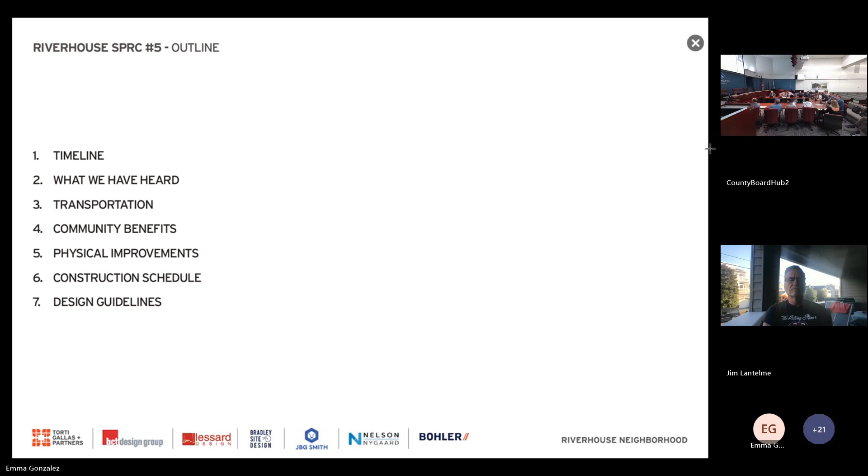Terrific. Thanks, Mr. Chair, members of the commission. We're excited to bring you a presentation for SPRC number 5 for RiverHouse. On the next slide, a quick look at our agenda. I won't walk through each item specifically, but it'll give you a sense of what we're going to talk about here tonight.

On the next slide is just our timeline and where we've been. As we've talked about, we've been at this for some time, since the sector plan was adopted more than 3 years ago. In that time, we visited the LRPC 3 times, and this will be the 5th of the SPRC, along with a public space master planning process as well.

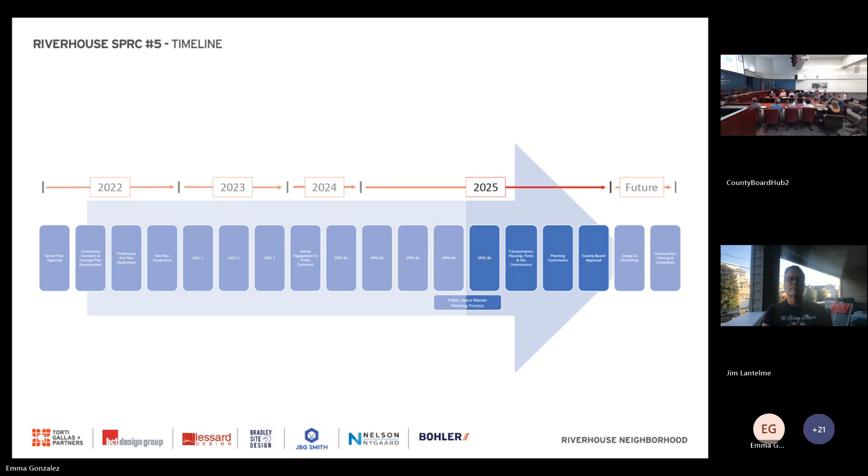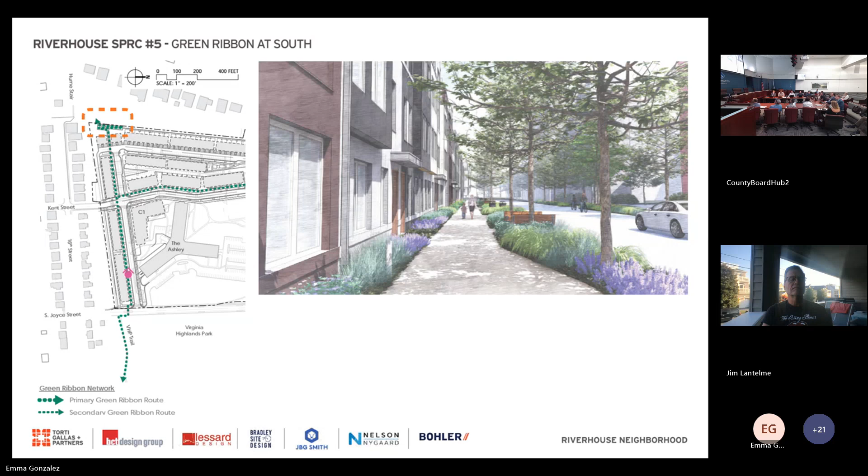On the next slide, a few changes based upon what we heard at prior meetings. First, we heard a desire to straighten the green ribbon at the southwest corner of the site where the townhomes are. Previously, this path had a dog leg in it as you hit that southwest corner of the site that folks thought was a bit confusing and circuitous. That has now been straightened out to allow the green ribbon to go on a direct path through the entirety of the property, running north-south, as you see there on the screen.

On the next slide, there's been some discussion of the connection up to Lynn Street at the western edge of the site and a request for more information about studying an alternative, as well as some views. Here you can see what our proposal looks like. We've worked with staff and the community to come up with this proposal, and we think it's the best possible solution for a number of reasons, principally addressing the difficult topography in the area, providing accessibility, and preserving both existing vegetation and a view corridor.

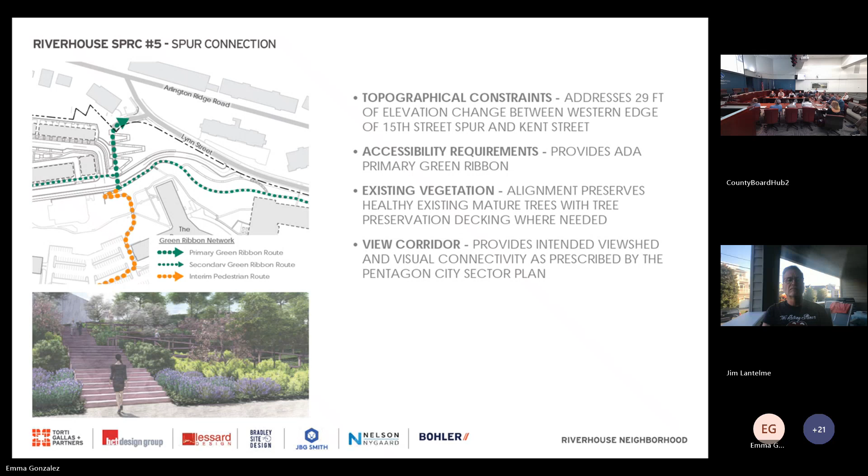On the next slide, you'll see we've added a little depth and more detail as to what this area may look and feel like, showing lighting treatments, seating interventions, as well as wayfinding opportunities. This gives a better sense of what the area is going to look and feel like when it's complete.

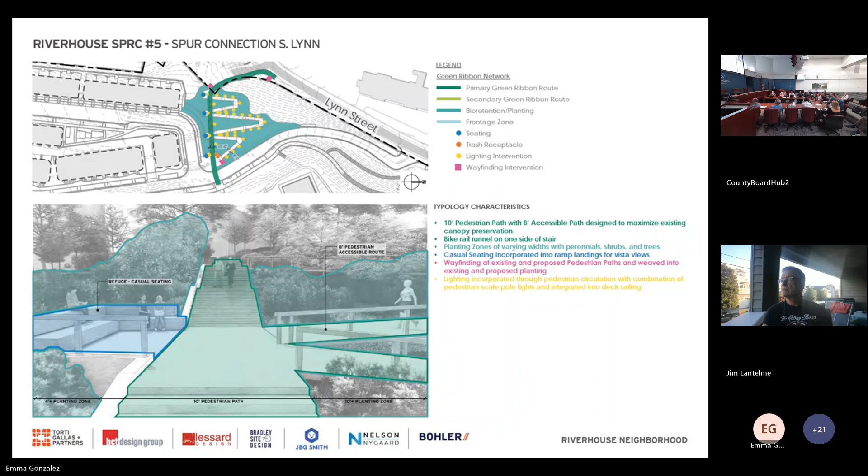I want to reiterate that C2 and C3, while part of the overall PDSP, are not being approved as part of the final site plans before you this evening. They would only go forward in the event of future final site plans. On the next slide, you will see the view without C2 and C3.

This is the condition that will be, if this project goes forward in what you're considering this evening, this is what would be approved. This would be the view from the top of that spur.

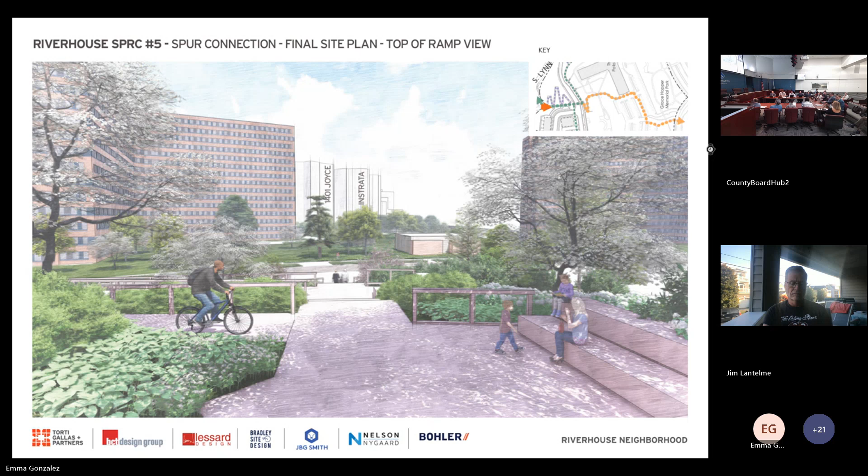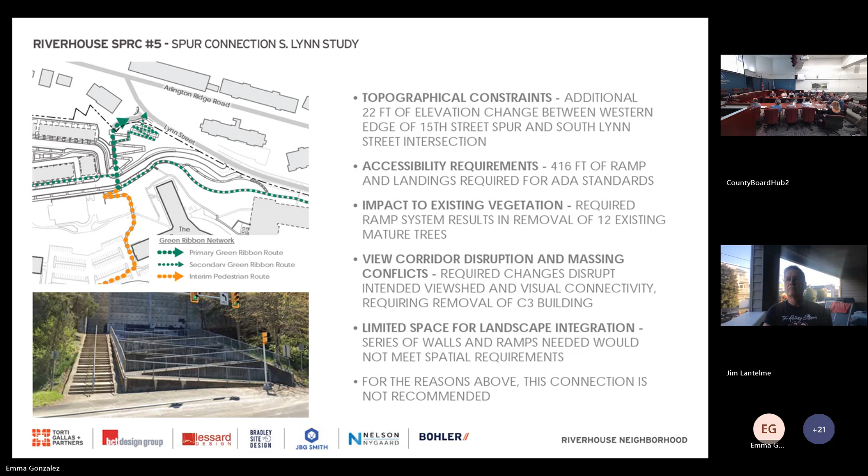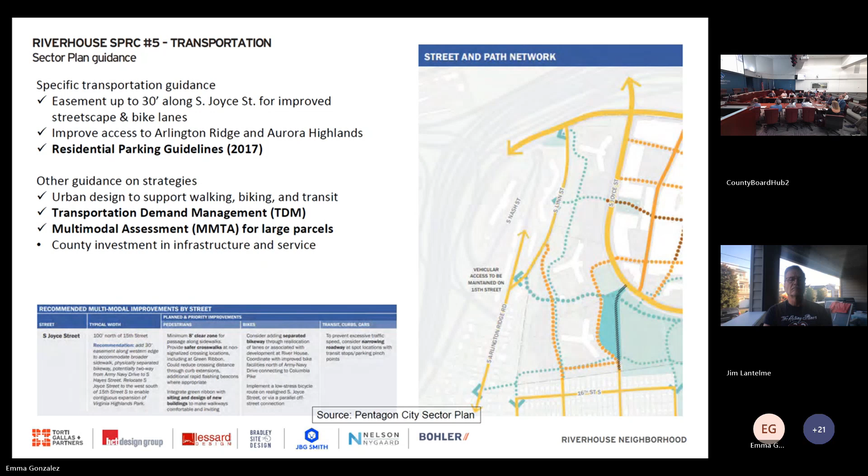With that, I'm going to turn it over to Chris Fornash to discuss transportation. Thank you, Ked. On the next slide, we highlight the requirements of the sector plan with respect to transportation. The unbolded items are things we discussed last time, specific street reconfigurations and other multimodal elements. Today we'll speak briefly about the bolded items: parking, TDM, transportation management plans, and the results of the multimodal transportation assessment.

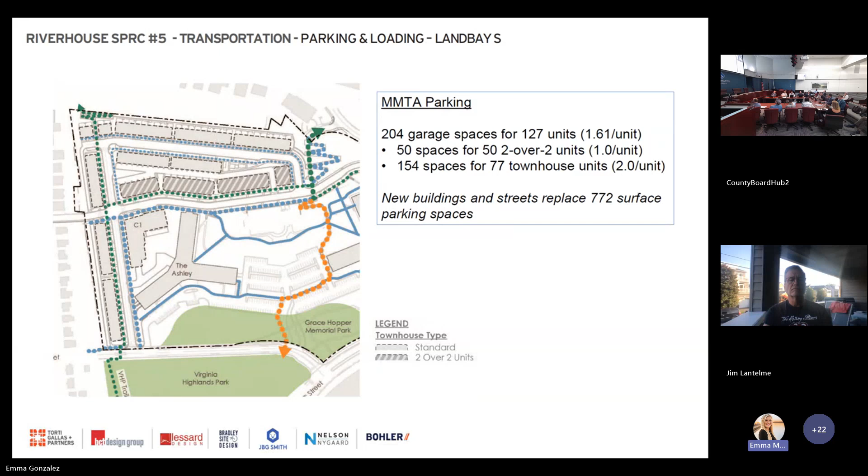Next slide. Starting with parking and loading, here you see Land Bay S highlighting two different types of units: standard townhouses and 2/2 stacked flats. The stacked flats have a parking ratio of 1 space per unit, and the townhouses have a ratio of 2 spaces per unit, for a total of 204 spaces for 127 units. Also notable, this Land Bay S development is replacing currently 772 surface parking spaces.

The next slide, building C1, has more information. I'll start with the locations of loading and parking garage access, that's the blue and yellow arrows. You'll see they come off the extended 15th Road. The red arrow indicates where the roll-in entrance is for the bike parking indoor in the garage at grade. In total, there are 42 vehicle parking spaces for 102 units in this building, a ratio of 0.41 per unit.

And 6 additional spaces for visitors, plus 48 indoor at-grade bike parking spaces, so 0.44 per unit plus visitor space inside. This building replaces 44 surface parking spaces currently. Last time we heard some concern about where pickup drop-off would occur here, so highlighting next to the red arrow the space on the curb, that's 2 spaces reserved for pickup and drop-off in front of the main entrance of the building on extended Kent Street.

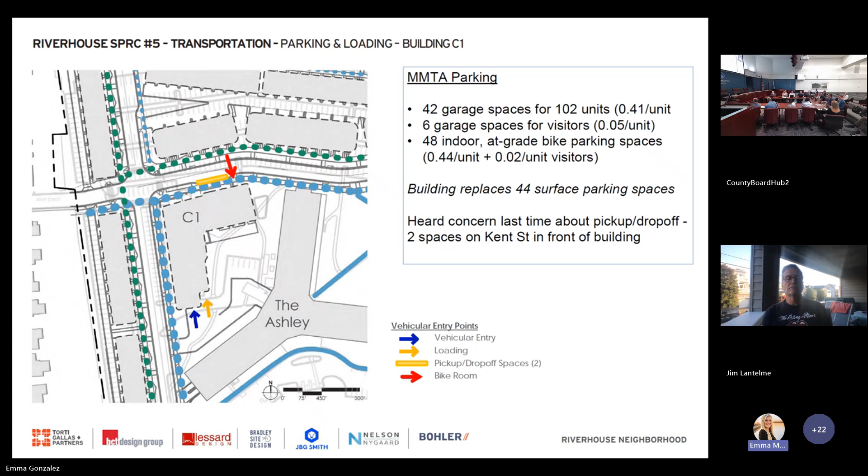Next slide, building N1. This is a larger building of 509 units. There are 512 proposed garage parking spaces on two stories, two levels. 265 of those are for units in the building, that's 0.5 per unit plus required visitor spaces. There are also 32 spaces for the 15,000 square feet of retail in this building, proposed to be a health clinic use, utilizing requirements related to that use. And then an additional 215 spaces to replace existing parking, made available to existing RiverHouse buildings and tenants.

I realize I skipped over pointing out where both the vehicle and loading dock entrances are to this building. They're on the left, the blue and yellow arrows, and those entrances are off a driveway that connects to big Joyce Street at the bottom of the page. The entrance to the bike room is the red arrow adjacent to the mews. Although it's next to ramps and other grade changes, it's an at-grade roll-in entrance to the bike parking facility, where 204 indoor at-grade bike parking spaces are provided, that's 0.4 per unit, plus additional outdoor spaces for visitors. There's also one space in the indoor facility for a retail employee, plus additional visitor spaces outdoors. And again, this building is replacing 254 current surface parking spaces.

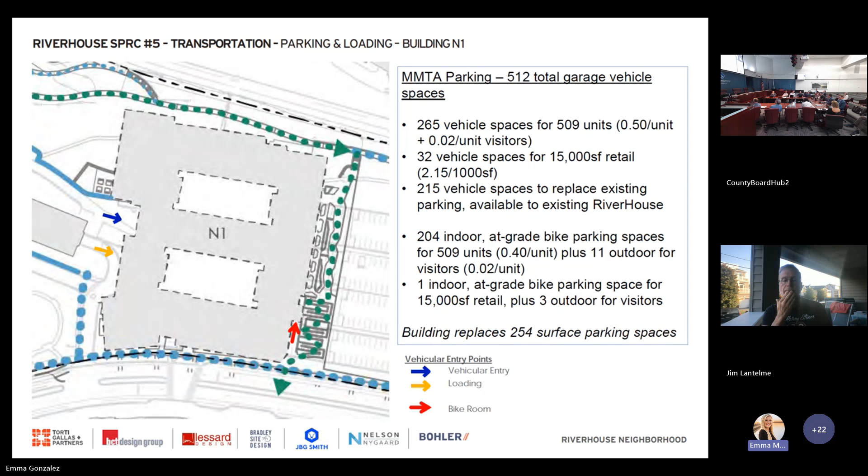The next slide goes into some detail about the multimodal transportation assessment. Many of you on this committee are familiar with what an MMTA requires. While we're talking primarily about the full site plan buildings that are the subject of SPRC, the MMTA considers the full PDSP. It's important to look at the potential traffic and other transportation implications of the full development at this point. So the MMTA looks at access by all modes to and around the site.

In the middle here, I want to go into a little detail on what the MMTA considers in terms of development. For the full PDSP in this case, you start with the base year traffic.

That includes traffic generated by the 1,676 existing residential units, or more appropriately, the people in those units. We then add in potential traffic from newly approved or built projects, as well as other redevelopment included in the sector plan, and general background growth. And then to represent the project itself, all of Land Bay S, all of building C1, as well as potential future buildings C2 and C3, building N1, and potential future buildings N2 and N3.

So that's 2,785 new residential units that generate on average about 7.5 person trips per unit. We can go into more detail about that if you'd like. And 570 daily person trips to and from the 19,000 square feet of retail space in the full PDSP.

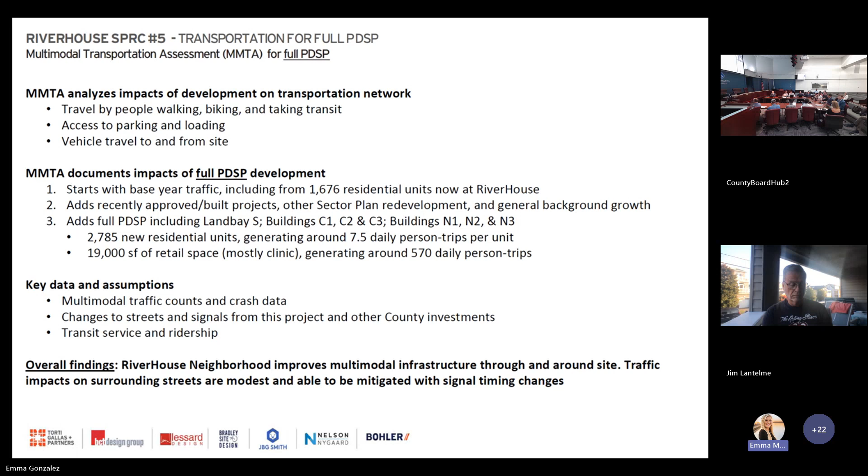Next slide, to add a little more detail - the graphic on the right shows, in black arrows, the forecast estimated number of vehicle trips in the morning peak hour coming to or from RiverHouse. Looking at the top right, consolidating all the RiverHouse driveways onto Joyce Street, in the section that will be road dieted, it's essentially just under 3 additional vehicles per minute accessing RiverHouse to and from big Joyce Street.

Again, reminder, this is for the full PDSP - that's the buildings being proposed today and final site plan, plus all potential future buildings. Moving to the lower right, to the southeast corner along relocated little Joyce Street, an additional just over 3 vehicles per minute. And then, smaller impacts at the 16th Street and Lynn Street access points to the site.

A little more detail about the street improvements included here, for the full PDSP: the road diet on big Joyce Street we described last time, the extension of South Kent Street through the site plus other on-site streets, the relocation of little Joyce Street to increase the size of Virginia Highlands Park, the final green ribbon and other walking and rolling paths discussed in previous SPRCs and today, and the Army-Navy Drive Complete Streets project currently being built by the county.

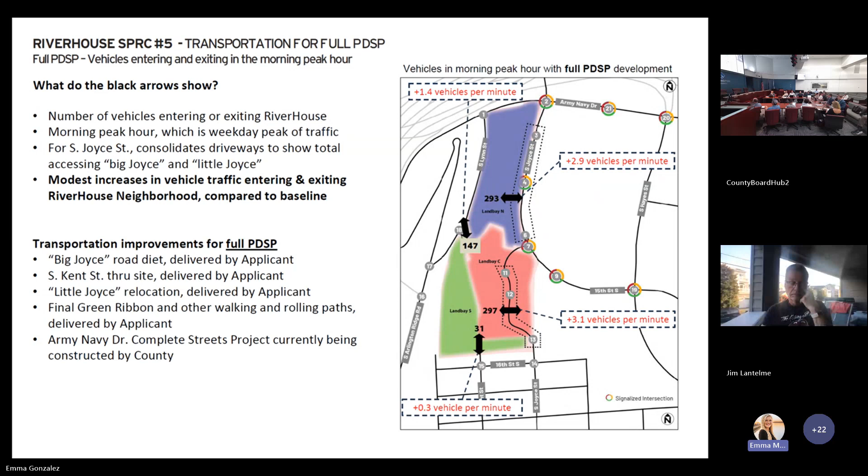Now, focusing on the transportation impacts of the final site plans - just Land Bay S, building C1, N1 - the analysis is largely the same, except we're including fewer new future units, 783 to be specific, still generating around the same average per-unit trip number, and somewhat less trip making related to retail space since it's only 15,000 square feet. And as this won't surprise you, the traffic impacts of this lower amount of development are anticipated to be even more modest than those from the full PDSP.

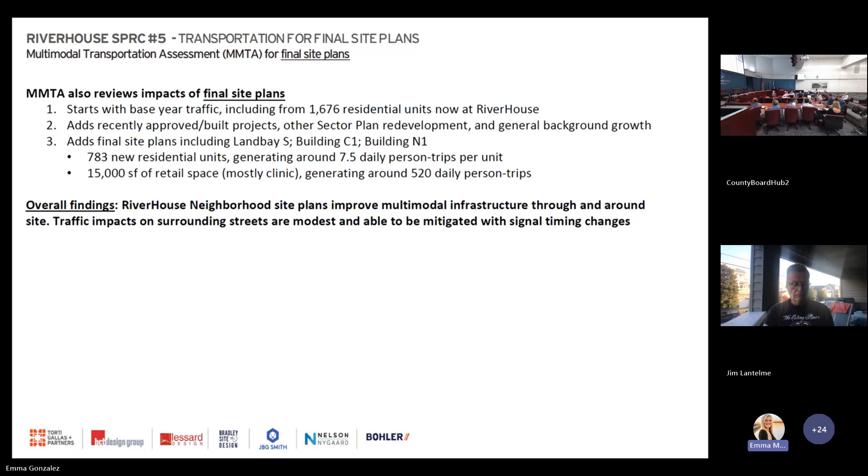The next graphic bears that out. It's the same type of information as the previous slide, but accounting just for the final site plans: Land Bay S, building C1, building N1. You see impacts ranging from 0.1 additional vehicles per minute entering or exiting by 16th Street, up to 1.1 vehicles per minute entering or exiting at Lynn Street. This includes all the transportation improvements discussed, except for the relocation of little Joyce Street.

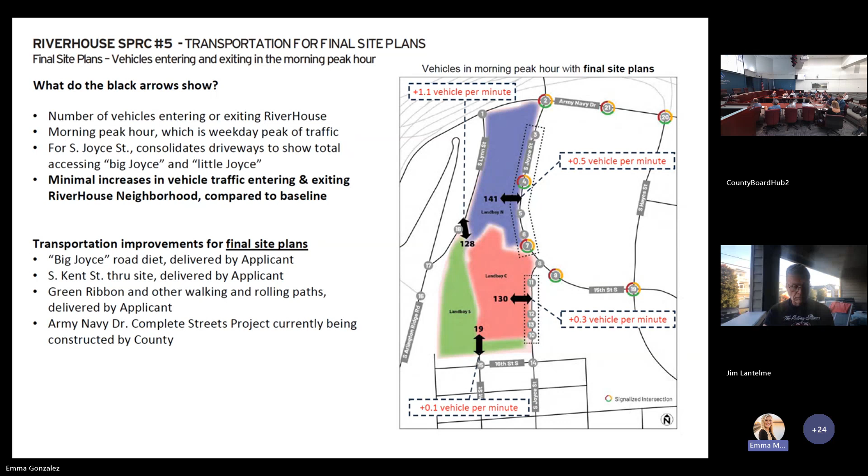The final transportation slide goes into a little detail on the transportation management plans, which incorporate the transportation demand management commitments of the development. You see a fairly standard set of participation, funding, and information provision components that will be part of the transportation management plans finalized as part of site plan conditions.

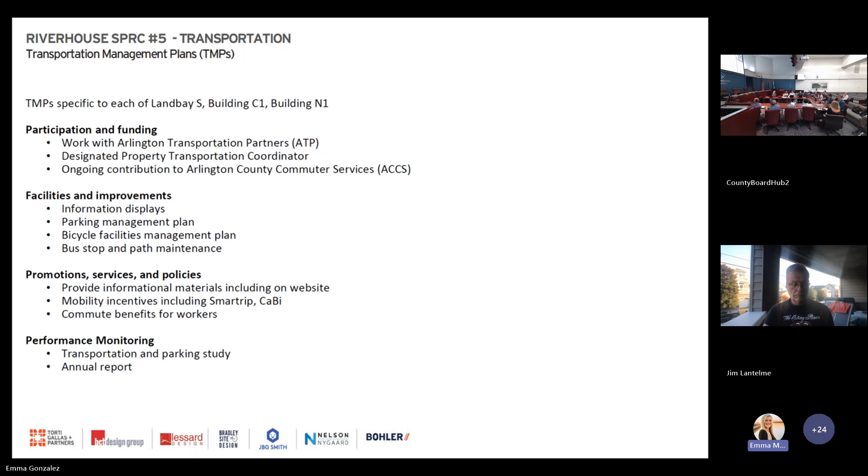We wanted to take an opportunity tonight to walk through at a high level the community benefits being provided along with these final site plans. It's important to talk about the level of benefits being provided - these are the same benefits that are in the county's policies, the same benefits called for in the Pentagon City Sector Plan.

So on the next slide, as we've discussed, we are implementing some very significant pedestrian opportunities with these site plans. This is both on the development sites themselves and also in some off-site areas where we're not building, but we're improving the pedestrian infrastructure.

We're providing a significant amount of pedestrian pathway where there's virtually none today. This includes both the green ribbon in its final condition and the interim conditions in other off-site areas, spanning nearly the entirety of the site. You can see those pedestrian areas here shown on the map—they exceed over 1 mile in total of additional pedestrian network, all brand new, which doesn't exist today.

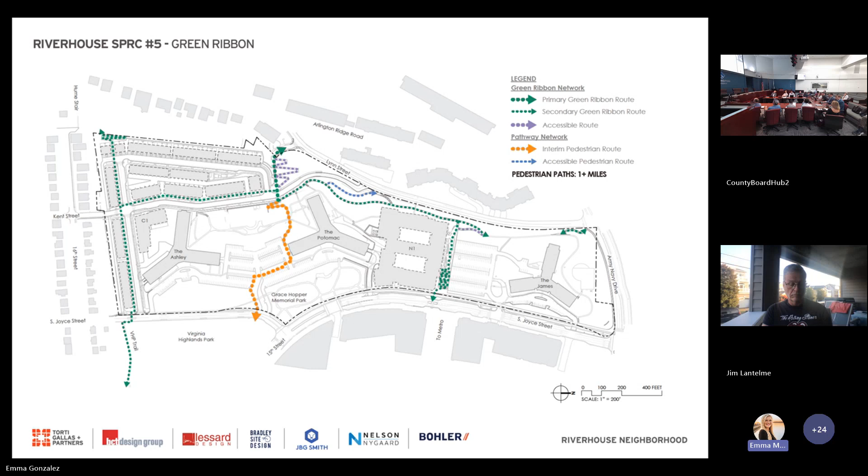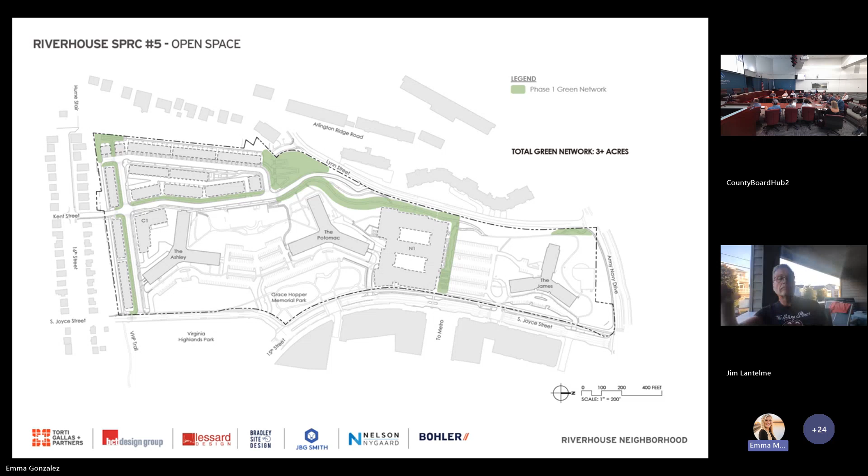On the next slide, in addition to these pedestrian paths, the proposed development is providing a significant green network throughout the site—again, something called for by the county policies, plans, and the sector plan. This totals more than 3 acres of total green area, and as Chris mentioned, these are replacing parking lots and impervious asphalt surfaces. This is all new.

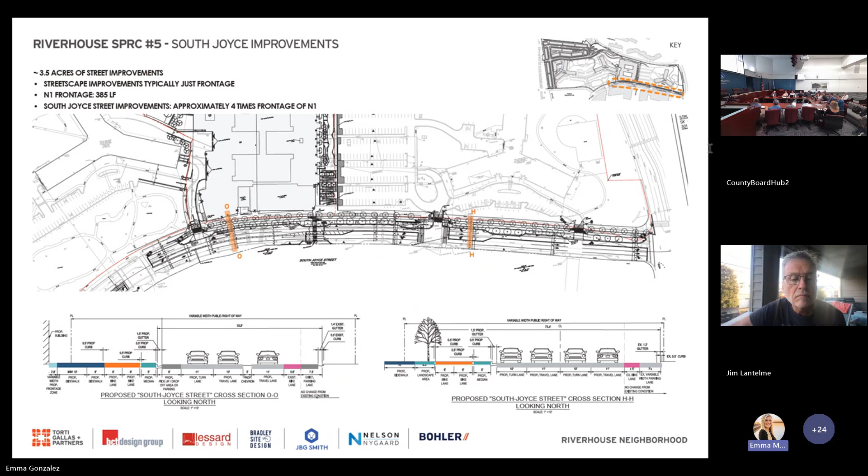On the next slide, in addition to these pedestrian improvements, we're making some really significant upgrades to the street network nearby, and the biggest of these is South Joyce Street. Typically, a developer is obligated to improve only the area of the street corresponding to the frontage of the building. In this case, we're doing far more than the N1 frontage—about 4 times the length—in our South Joyce Street improvements, equating to more than 3.5 acres of street improvements coming with these site plans.

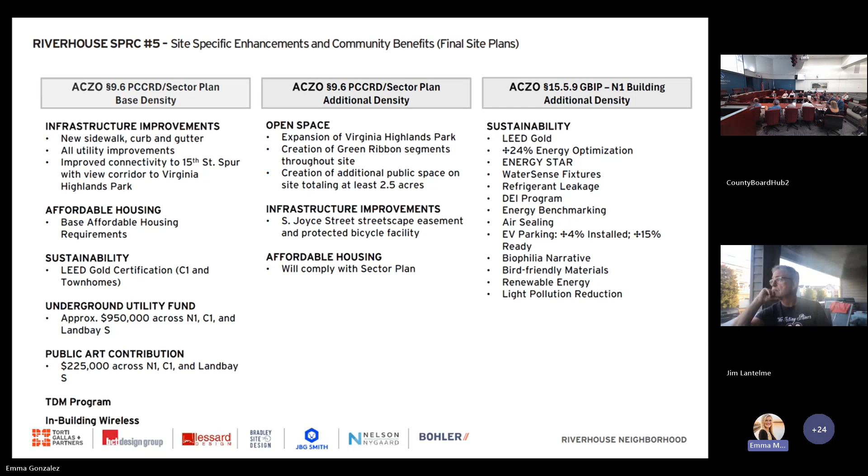On the next slide, you can see more information about the various buckets these improvements fall into. I won't belabor these, but I'm happy to talk about any of them if necessary. We're very proud of what we're providing, both in terms of base density, bonus density, and the Green Building Incentive Program. So with that, I'll turn it over to Belle to talk a little bit about phasing.

Thank you. The next few slides illustrate how the site's improvements, shaped by the community benefits and enhancements just described by KED, come to life through phased implementation. In this first diagram, we see the complete physical build-out of the RiverHouse neighborhood, showing open spaces, roadway improvements, and the full green ribbon network.

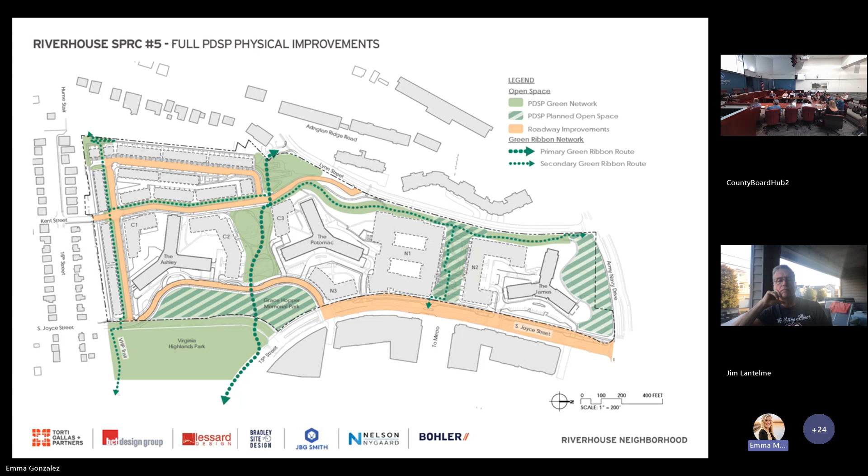The next slide, we start moving through each of the phases, beginning at the South Landbay. As shown in orange, 15th Road, Kent Street, and the Loop Road are fully built. Key green spaces are also delivered, including the secondary green ribbon alignments along Kent Street and 15th Road, plus the primary green ribbon to the 15th Street spur from Kent Street.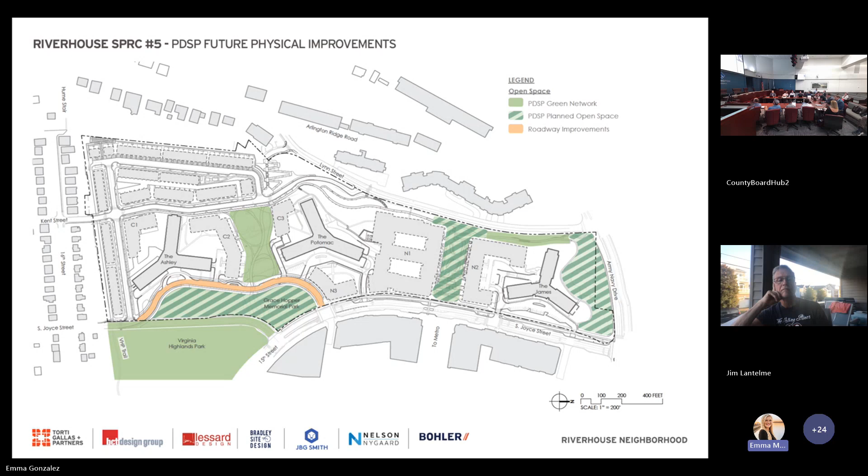Thanks, Belle. Just to wrap up here with a little information on our construction schedule. As the next slide shows, we anticipate approval of Land Bay S, Building C1, and Building N1 here in 2025. The Land Bay S project is anticipated to go first, at some point in 2026, followed closely by Building C1 and N1 the following year. We anticipate all these projects will take approximately 24 months to complete.

I want to close by saying that this commission process and the board process is not the end here. There's going to be a significant level of coordination from the applicant with the county and the community going forward, throughout the finalization of the design and the permitting process. Part of our obligations in the site plan conditions is to have a community liaison, so folks always have somebody they can contact and get in touch with the development team, ensuring we remain open and have a discussion and dialogue throughout this process. Thank you for your time, and we're available for any questions you may have.

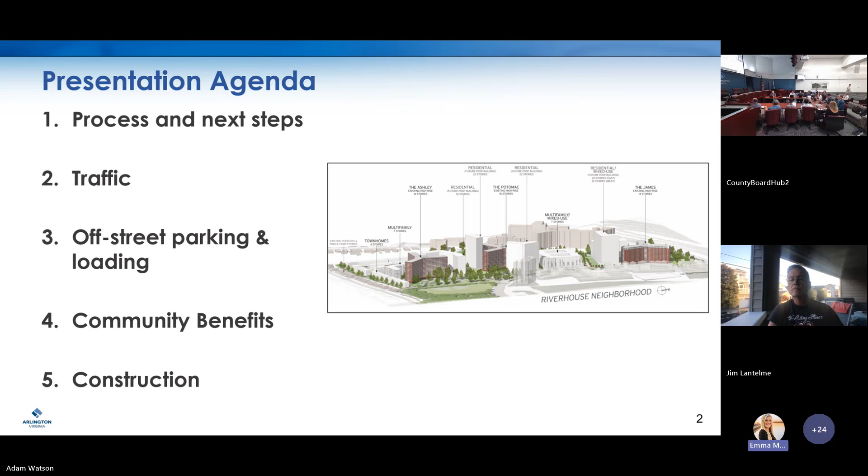I just want to start out by saying thank you to everybody who's participated in this planning process. It's been a long one. We started back in August of 2023, and we're here this evening for our final SPRC meeting. I also want to say thank you to the folks who participated in our public space master planning process. We had over 800 comments received on that.

We really appreciate the feedback and input on that. Please stay tuned, we'll have more outreach and engagement regardless. We may have another round of survey depending on the conclusion we draw after we have an opportunity to thoroughly review all of these 800 comments. But at minimum, reaching back out to those participants and to this SPRC to let them know how that park design evolves as it's headed towards the commission hearings and the county board.

Also just wanted to echo what Ked said a minute ago. We've had 13, including tonight, county-led engagements since July '23. We've talked about all of the topics listed in blue on the side of the screen, many of them on more than one occasion. And also to echo what Kedrick said, this isn't the end.

We're going to be working closely with the applicant to make revisions to the 4.1 plan set and to the MMTA and to the PDSP design guidelines and all the other documents that are required to be submitted with this, before we go to the commissions listed here and the county board. So there's still much more opportunity for public comment and feedback at Transportation Commission, Planning Commission, Parks and Rec Commission, Housing Commission, and we'll eventually go to the county board.

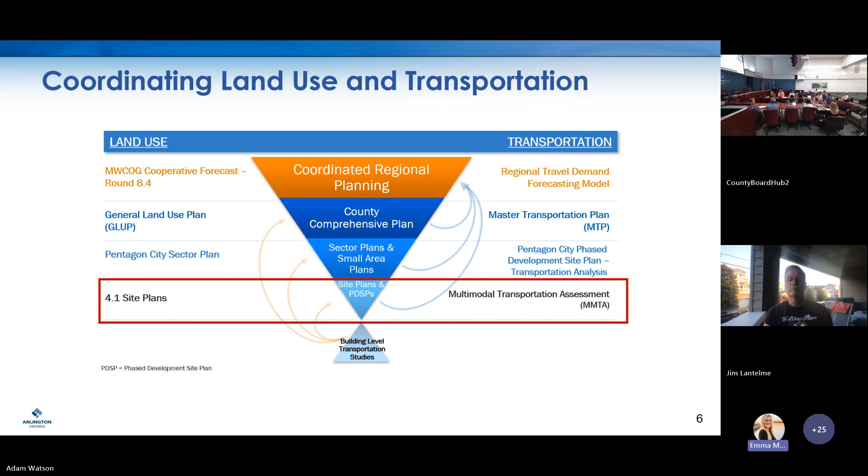Now going into some of the details that Chris mentioned about the overall PDSP study. If you dared to dive into the many pages of the MMTA, you'll come across a very number-rich chart, and that is the trip generation estimates for the project.

These trip generation estimates utilize national standards for how many trips people take in each housing type. And then they incorporate Arlington County data on how many people may use cars, how many people may bike, and how many people may walk.

So in this table, it breaks it down for all of the different land uses. And all of the different land uses and numbers that you see on the far left-hand side are incorporated into their model and their analysis for levels of service. And so this shows the math, but it also shows that the PDSP is thinking of all the different build out at a 2035 horizon.

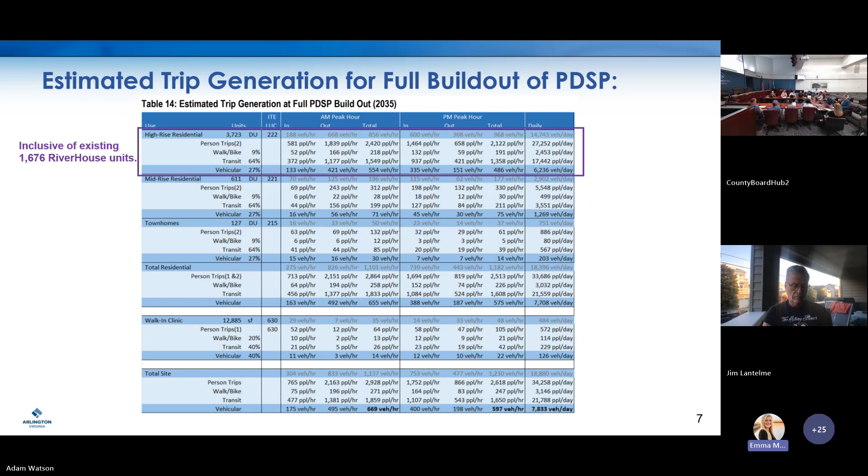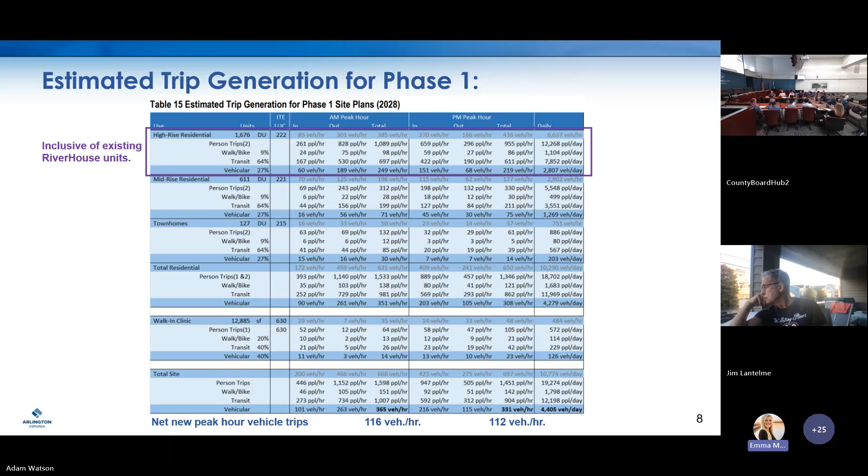Overall, when we look at the results of the MMTA, the county still has some details that we're working through with the applicant, and I think we've heard some from the community about how South Joyce should function for access to the grocery store and things like that. We're still working on those details, but generally speaking, we find that the transportation network as proposed and envisioned in the planning processes can support the proposed development in the RiverHouse project.

And with that, I'm going to hand it back to Adam for parking. Thank you, Mr. Gibson. Moving on to off-street parking and loading. I'm going to start big and get more granular here, but I'll start with talking about overall parking policy and regulations.

So the sector plan recommends that we create a pedestrian-oriented district, one where people are walking and biking and using micromobility and transit as the predominant means of travel. That's the sector plan guidance on a 30,000 foot level.

When we drill down a little bit more, we also have some supplemental policy, our off-street parking guidelines, and it makes site-specific recommendations for how low or what the minimum should be for off-street parking. And so for this particular site, that recommendation is 0.4 spaces per unit for market rate units.

Now, if it's a committed affordable unit at the 60% AMI level, it's 0.28. If you go lower than that at the 50% level, it's 0.2. But the big number to keep in mind is 0.4 spaces per dwelling unit.

In addition to that, when a development is using these off-street guidelines to request a zoning modification to reduce parking, we also ask that developers provide 5% of the first 200 units for visitor parking. So that's usually 10 spaces for a building, for a mid-rise multifamily building.

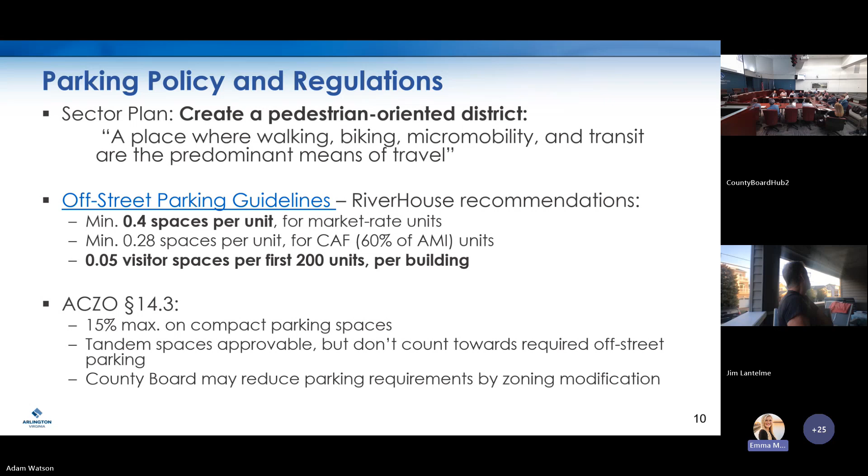And then lastly, the county board can consider reducing these parking requirements by zoning modification, as long as it's consistent with the sector plan and consistent with the off-street parking guidelines.

And so in terms of overall off-street parking, the PDSP is looking at a total residential parking ratio across the entire site of 0.45 spaces per dwelling unit. This is assuming that future buildings C2, C3, N2, and N3 would have a ratio of about 0.4 spaces per dwelling unit. Obviously, we would be looking at that much closer at the time of a final site plan filing, just to find out what the actual proposed parking ratio is.

Making that assumption, you get to a 0.45 spaces per dwelling unit, which is consistent with the number I was sharing on the previous slide. The rest of this is really just for reference, we can come back to it if we need to speak about it more tonight. I think the applicant's presentation covered it well also.

Briefly, the existing buildings would have a 0.46 spaces per dwelling unit ratio. There's a very small amount of existing retail in the James building, under 2,000 square feet, so they don't even require parking for that. Townhouses are at a 1.61 ratio, as Chris mentioned earlier. The N1 building would have a 0.52 spaces per dwelling unit residential ratio, plus 1 space per 462 square feet for the retail. C1, which is residential only, is also at 0.41.

Some things we're going to need to keep working with the applicant on include the N1 compact ratio. As I mentioned, we want to keep that at 15%. So we're working with them to see if perhaps there's excess parking in the N1 building that's not being counted for zoning purposes but will exist for those to use. We're also thinking about visitor parking for the existing buildings being accommodated within the existing surface spaces to remain, since those buildings are using the off-street parking guidelines to have a ratio that's lower than what it is today.

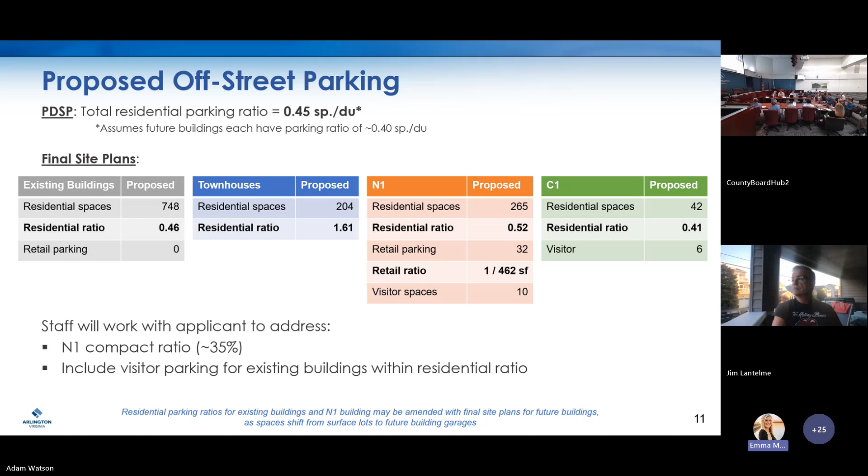Last thing is the off-street loading. I won't bore everybody with the zoning calculations for how you get there, but for the existing buildings, the applicant is asking for a modification to have 2 loading spaces for each of those buildings. I think staff supports that. That's less than they would otherwise be required to have, but we also know these buildings have existed for a very long time, and we think they'll function fine with 2 spaces proposed.

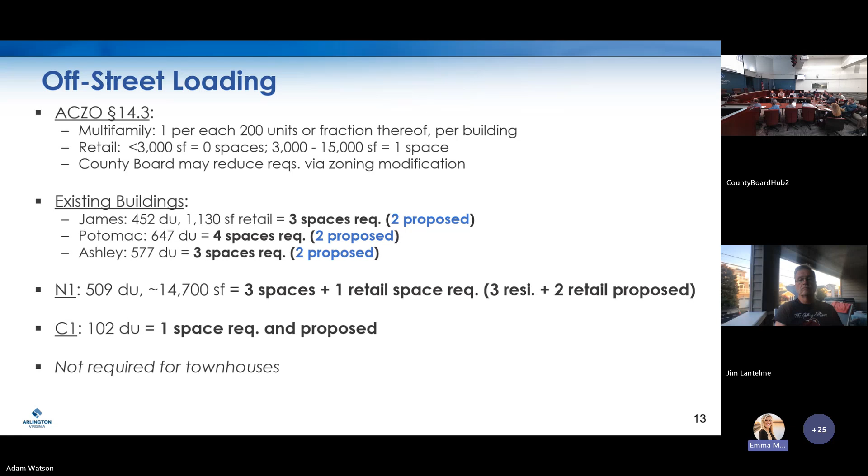For N1, it would be 3 residential loading spaces and 1 loading space for the retail, but they're actually providing more than that — 3 for residential and 2 for the VHC health use coming in on the ground floor of N1. Lastly, 1 off-street loading space for the C1 building. This isn't required for townhouses; it's just for the multifamily buildings with mixed use on the ground floor.

I'm going to jump into community benefits and provide an overall breakdown of how staff looks at how the density is being earned here. There are different categories — it looks a little washed out on the main screen, I apologize — but the blue is your base density, 72 units per acre, which we get from the sector plan and the zoning ordinance.

There's a whole number of things the developer has to do regardless of whether they're asking for additional density: new sidewalks and curb and gutter, new streets and streetscapes, all utility improvements, LEED Gold certification for C1 and the townhouses — the two areas not participating in the Green Building Incentive program — our base affordable housing contribution, public art (either a contribution or done on site), utility fund undergrounding contribution, TDM program, and in-building wireless for first responders. So that's the baseline level of density.

There are two additional buckets for the additional or bonus density they were requesting — the orange and green, which we refer to as community benefits. The orange are things explicitly identified in the sector plan as community benefits: expansion of VHP through land dedication, realignment of Joyce Street, creation of the green ribbon throughout the site, creation of additional public space totaling 2.5 acres, the protected bike facility along Joyce Street that the applicant mentioned, and at least 10% of net new units as committed affordable housing units on site.

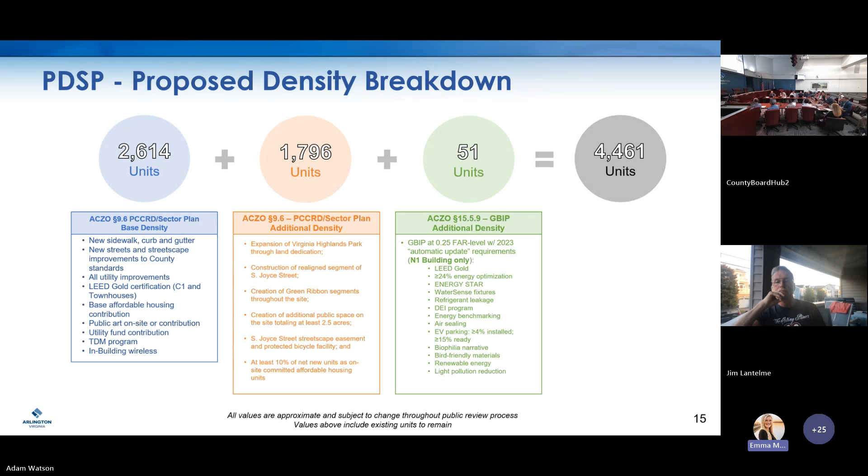I'm going to break this down further. These are the community benefits, getting into the orange and green bubbles. So the initial phases coming in, the townhouses, N1 and C1, we're looking at on-site affordable housing with a preference towards family-sized units. The interim N1, N2 public space and construction and maintenance of that. A whole number of green ribbon segments, including interim segments, as I'll show on the next slide. The separated bikeway that the applicant showed in their presentation, and then the GBIP at the 0.25 FAR level.

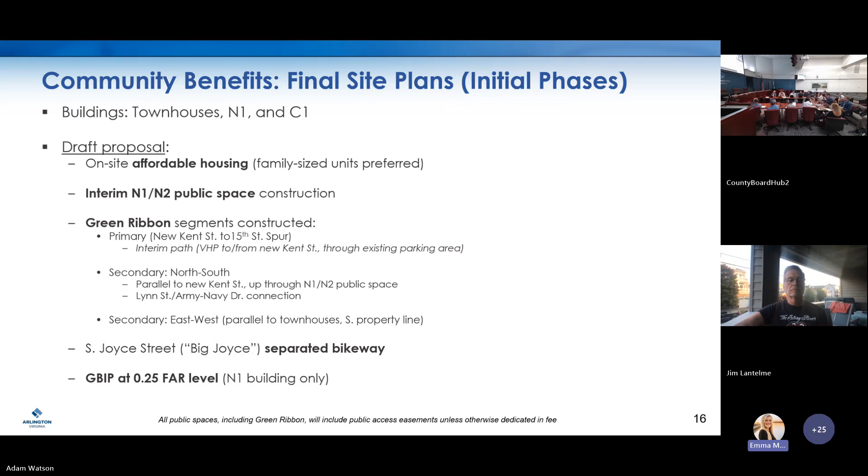So this is my attempt to create a graphic that looks as nice as the applicant's. I don't know that I succeeded, so we might need to use the applicant's better looking graphics for our discussion this evening. But this captures essentially the physical improvements in terms of the green ribbon, the public spaces, and the bikeway that would come with the initial phases.

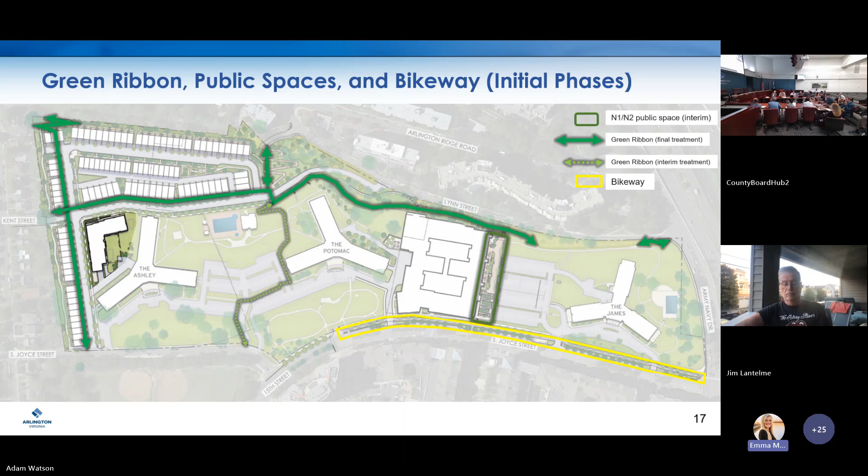Walking down the key here: the dark green box is the N1 interim public space between those two buildings, which would of course be expanded later in the final phase. The thicker green arrow is the green ribbon in its final state or treatment. The lighter dashed green is the interim treatment or pathway connecting you from Kent down to existing VHP and back. And in gold, the separated bikeway on Joyce Street.

In terms of our future phase buildings - N2, C2, C3, and N3 - those were generally the order in which they were contemplated to come in. We'd be looking at potentially more affordable housing on site.

The final iteration of that N1 interim public space was expanded to be about an acre. The final green ribbon segments, the big one being that primary segment between C2 and C3 building, itself about an acre overall in terms of space, as well as a secondary path between the N1 and N2 space that connects you up to Army Navy Drive.

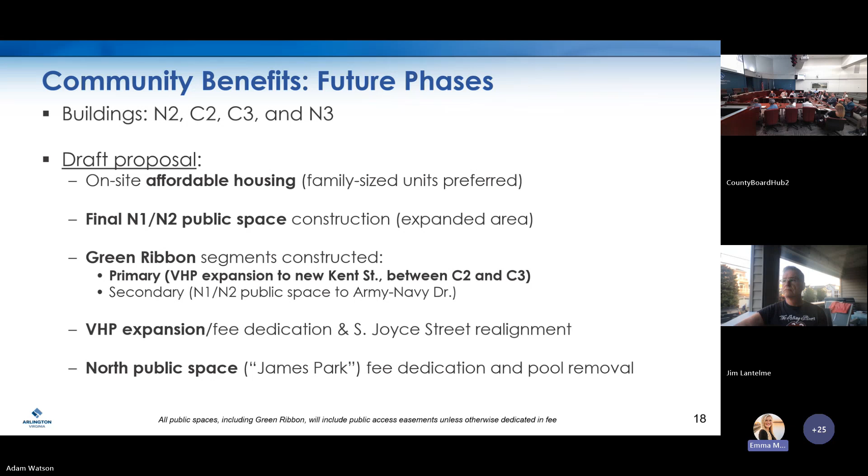The VHP expansion and that fee dedication, as well as the realignment of South Joyce Street to make Virginia Highlands Park one contiguous park space. And then lastly, the far north public space, labeled as James Park on a number of diagrams, on the far north of the site, north of the James building itself, with a fee dedication as well, and a planning process for that to occur sometime in the future.

I want to talk a little bit about construction. This slide has a lot of information on it. These are the construction related site plan requirements for each final site plan that have to be done prior to demo or land disturbance permit issuance and/or throughout the duration of construction. I want to note these are conditions in the site plan ordinance that are construction related, that go above and beyond what's just in the county code, the statewide building code, and federal laws that obviously must be complied with as well.

In terms of maintenance of traffic, the condition sets limits on the hours construction can occur in the public right of way, limited to 9 a.m. to 3:30 p.m. Monday through Friday, and/or 10 a.m. to 6 p.m. on weekends and holidays. They also need to maintain a 5-foot minimum clear width along existing streets for pedestrians to use. The construction hauling route plan will be coordinated with the civic associations as well as our zoning administrator and the police department, and maps of that will also be posted inside the construction trailer.

In terms of on-site construction activity, the hours are limited to 7 a.m. to 9 p.m. on weekdays, and 9 a.m. to 9 p.m. on weekends and holidays. An off-street parking plan is required for the construction workers as well, which is also submitted to the zoning administrator.

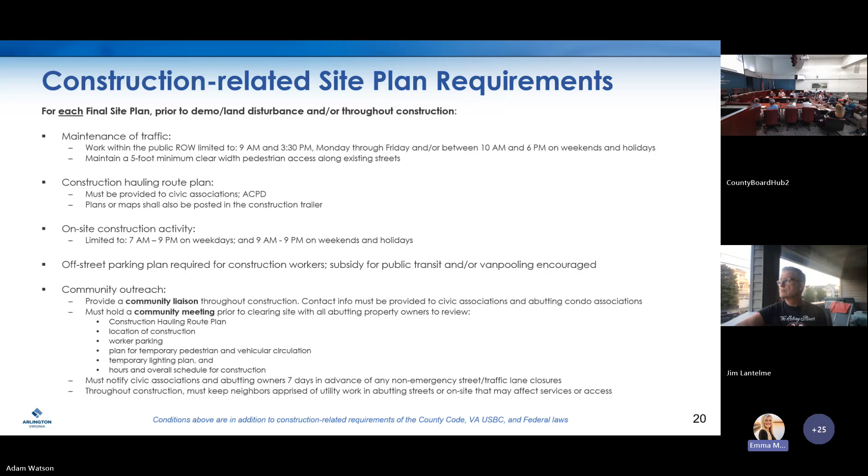They also have to notify the civic associations and abutting property owners 7 days in advance of any non-emergency street or traffic lane closures. And then lastly, throughout construction, they have to keep neighbors apprised of any kind of utility work occurring on abutting streets or on site that could affect levels of service or access.

So with that, these are our discussion topics for this evening. The only one I wanted to call special attention to is the PDSP design guidelines. We don't have any specific materials to present on that this evening, but we wanted to open it up to the floor if folks have comments or questions. That document is essentially a bridge between the 4.1 plans and the PDSP itself and the sector plan. It's really meant for the future phases that come in. It's more of a narrative format of the information that's already in the 4.1 PDSP record.

So if there are any comments at all about that, we just want to make sure we capture those, as the applicant will be taking those back to finish their work in terms of updating those PDSP design guidelines. Otherwise, we have project updates, traffic, off-street parking and loading, community benefits, and construction on the discussion agenda. And Mr. Chair, that concludes staff's presentation.

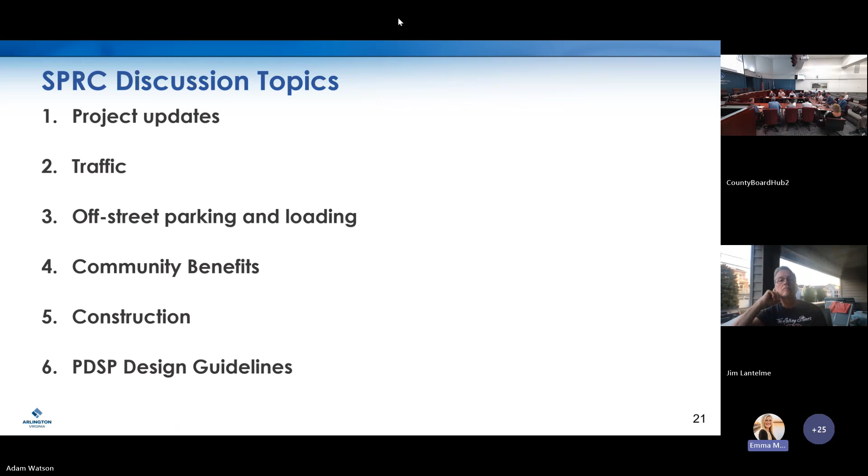Thanks. Great, thank you. So we have just shy of an hour for our discussion before we are going to be accommodating our public speakers.

So as a refresher, the way that I like to do this is to begin by asking, going around the table, clarifying questions which are factual or informational. If I don't see someone coming to a question, I will invite you to do so. I'm going to go first, and then turn it over to Mr. Reb, then go clockwise from there. Actually, Mr. Reb, with your indulgence, are you still having a quorum issue? So I'm going to go to Mr. Trivedi first, then ask, then go to you, then we might as well just go counterclockwise after that. But Commissioner Trivedi.

Thank you. I'll be quick. So for the EV charging spaces, I see for N1 you're going for the additional density, which you're doing the 4% EV parking and 15% EV ready. I didn't see from looking at the documents what the ratio would be for the rest of the buildings, or the full PDSP or the full site plan. So I was wondering what exactly that was going to be for every other building.

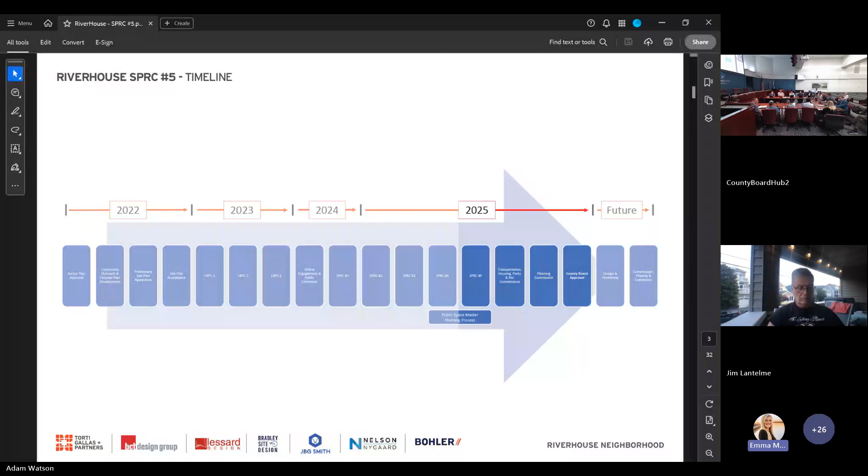I know Richard asked this question earlier, related to Kent Street. I would like to understand a little bit better how you forecast the traffic on a non-existing street, since that street right now does not go through at all. I find it hard to believe that on slide 17 of the applicant presentation, it shows 293 cars going one way, 147 another way at full build out, 297 going there, and then 31 down Kent Street. I find that highly unlikely considering you also have connections to Alexandria. I'm curious if you can explain how you calculated that, knowing that area. For the county, we really need to pay attention to that because there are no stop signs in all the areas, and you don't have sidewalks. Just kind of curious.

One step in that is looking at how current users of RiverHouse, residents and visitors, distribute themselves in terms of leaving the site or accessing the site. We look at those percentages as representative of the future RiverHouse, because those units will still exist. Then in conversation with the county as part of the scoping process, we thought about the likely places where people will be driving to and from this site in the future, and how that will change.

In general, if people are heading to Alexandria, what we see in current data is that they're going out to Route 1 and not primarily through the neighborhood. We tried to reflect that grounding in the reality of the data collection we did over the last couple of years. That's the short version of the answer. I'm not sure how satisfying it is, but I'm happy to have more conversation about it.

Not very. But I think the existing traffic is really important to understand, it does provide a baseline. There's currently a very large number of parking spaces accessible to the neighborhood from Kent. There's an existing driveway, you can get into the neighborhood on Kent. That helps us understand what existing residents' choices are.

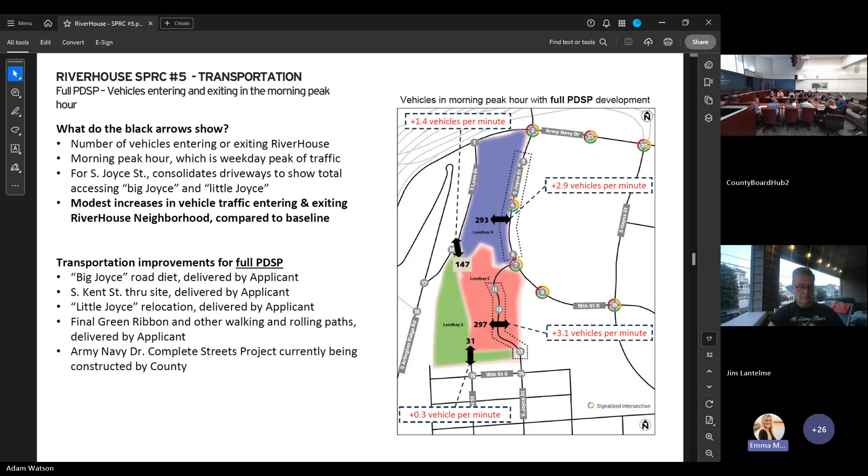I noticed in both the applicant and staff presentations for community benefits, we talk about providing significant funds for burying power lines around N1 and Land Bay S and near C1. Is that just a contribution to the fund, or does it mean those power lines will actually be buried as part of this project? Generally speaking, everything abutting the site needs to be undergrounded as a baseline of doing a site plan. In addition, there's also a monetary contribution to the utility fund. Two separate things. Yes.

But we are not asking for the aerial utilities in the old Lynn Street right-of-way to be undergrounded. So on the edge of the property with the green ribbon, that stuff's not going underground? I'm just looking at the map, along the north, technically west part of the property, there's power lines all along that stretch, and along the eastern edge of Lynn. I think it's pretty consistently along all of Lynn there are aerial power utilities, yes. So those will not be buried?

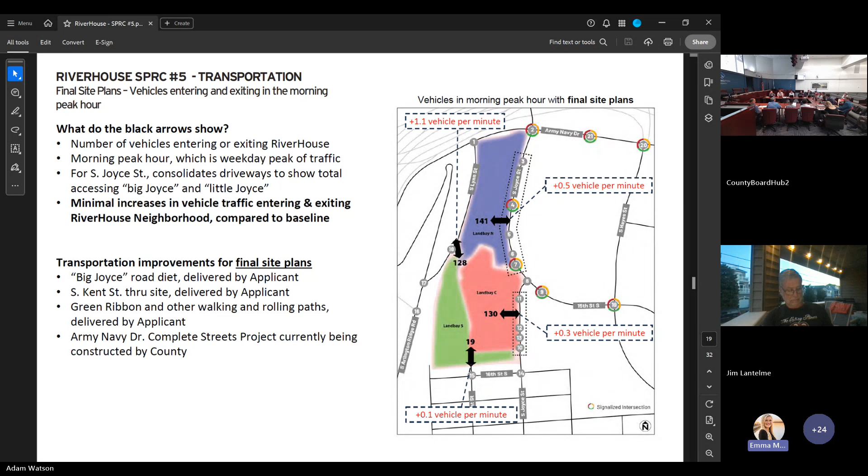Thank you. One more quick question, it may not be a clarification question, but one thing that occurs to me is parking for the employees of the clinic, because the VHC clinic is going to be a fairly large facility, and you talk about 32 spaces overall, and you could have 30 employees trying to take all of those spaces. So is that a minor detail, or could that potentially upset the balance of parking in that area and cause a problem?

I think the amount of parking dedicated to the proposed clinic use was based on the expected number of employees at a clinic, and in consultation, I'm guessing, with the proposed users. So I think that's been taken into account, but I understand the concern.

Sorry, the 32 spaces you're listing, is the retail mostly the clinic? Right, that's right. It includes what you would need for the staff at any given time, includes staff and visitors/users. Okay, and did I hear you say that number is developed in consultation with... I'm seeing head shaking, so I might have said something incorrect. No, that's based on the ratios set forth in the zoning ordinance. Okay, that's for that specific use, right? And for that use.

This isn't the end of the discussion or the road. There are parking management plans and a significant other set of plans that are reviewed and approved by the county before anything is built, to ensure proper operation of the garage.

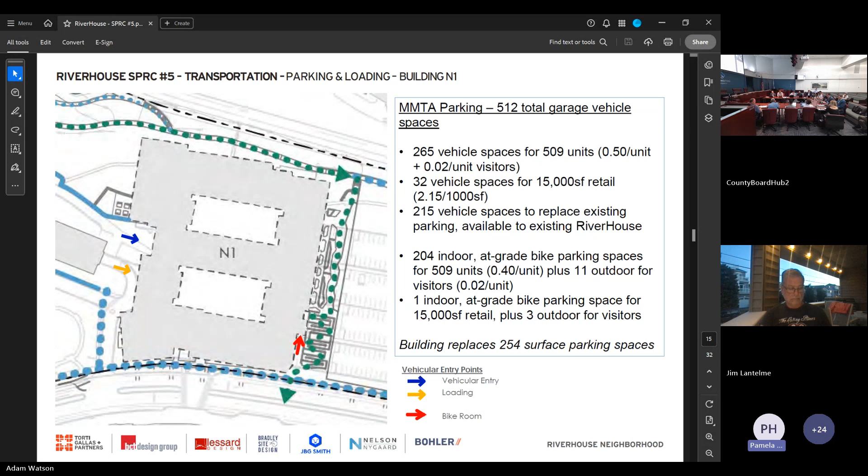Hi, can you hear me? Okay, I have 4 real quick clarifying questions. The first one is about the estimated trip generation data. For every type of housing, it's the same mode split, no matter what type of housing you're in or where you are on the reservation: 9% bike/peds, 64% transit, 27% vehicular driving, and I find that a little odd.

That's my first question. My second question is the traffic impact study was for the morning rush hour—is there any consideration of doing an afternoon rush hour, which may be a bit more interesting? My third question is, I see these beautiful stairs in the designs—do they all have railings? That would be really nice to have.

And my final question is about when is the earliest that you might be able to move Little Joyce? It sounds like it would be way down in the review process—we need to be, it can't be done now, you have to have other parts of the proposal in there. Is that correct? And that's it, thank you.

The MMTA does include PM peak analysis, so that has been accounted for. As far as the general mode splits, there are some things that we just—this is a tool to estimate what's going to happen on the roadway network. It's not, like I said before, every little vehicle; we're dealing with big numbers. We feel that these estimates are appropriate for that type of analysis.

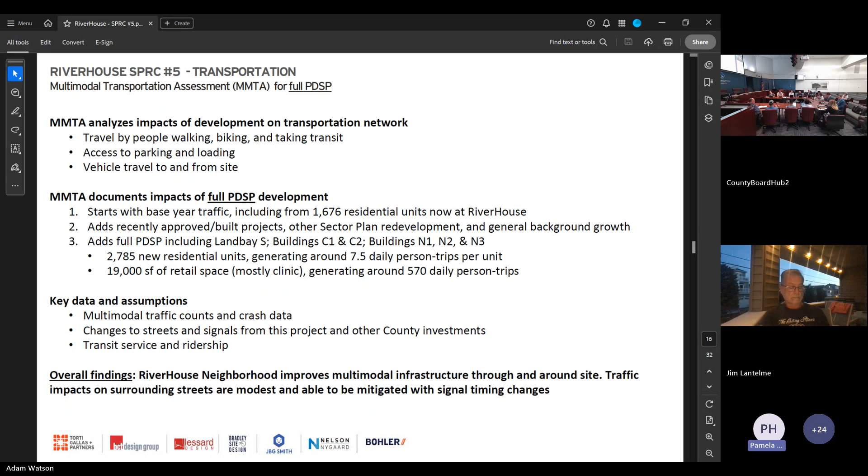Yes, thank you. All stairs will have railings in accordance with the ADA guidelines. Oh, wonderful. I didn't see them explicitly in the diagrams, and I can certainly use some stairs if I have a railing, but I can't use any stairs if there's no railing. So thank you very much.

Mr. Jacoby and then Commissioner Haynes. Thank you, Mr. Chairman. I have two questions.

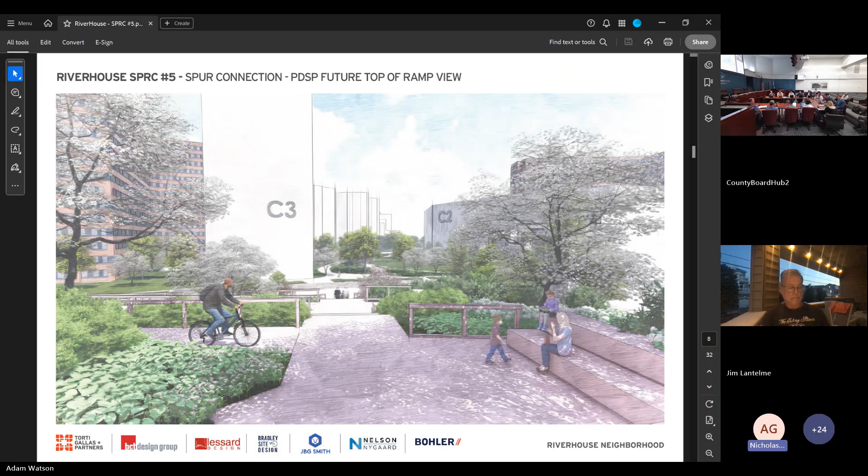The first is concerning the staff presentation on RPP. There's a diagram that showed the RPP adjacent to the site. I want to point out that the residential permit parking program in our neighborhood is only valid from 8 a.m. to 5 p.m. Monday through Friday. So how will either residents or guests in the evening or overnight, how will that parking be controlled since the RPP won't cover it?

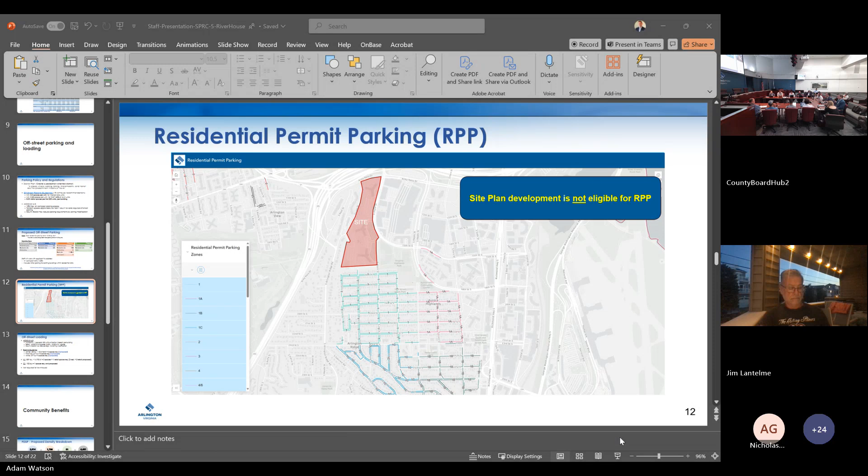So the county doesn't have a process to preemptively adjust those timings. Those timings are based on what RPP was initially planned for, which was to address commuter parking. And as we have had a sort of evolution of the RPP process, we're also dealing with site plan projects that may have overflow or other non-neighborhood parking. We have a process in the RPP to address that, and we would have to do studies and change those times based on observed utilization of the parking.

And can we get those studies done fairly quickly to ensure that the situation doesn't degrade too much? Staff is generally responsive to answering RPP requests. We do not do studies year over year over year, so I think there's a 2-year moratorium between each study. So I would just say, plan ahead on how you want to do that, because if you ask for it and it's not justified, then it's not justified for at least 2 more years. Yeah, my fear is that you're dumping this on the neighborhood and making this a neighborhood problem to solve when it's something that should be solved by the staff and the applicant in advance.

Mr. Jacoby, did you have a second question? Yes. My second question is about the PDSP. The PDSP is kind of getting a free ride in this process. So my question is, what happens, say 10 or 15 years from now, when JBG Smith or a successor applicant comes in with a PDSP, with a 4.1 application that is more in line with the initial proposal? Are they still bound to build out all of the community benefits that have been discussed, or would those then be reopened for negotiation? Thanks.